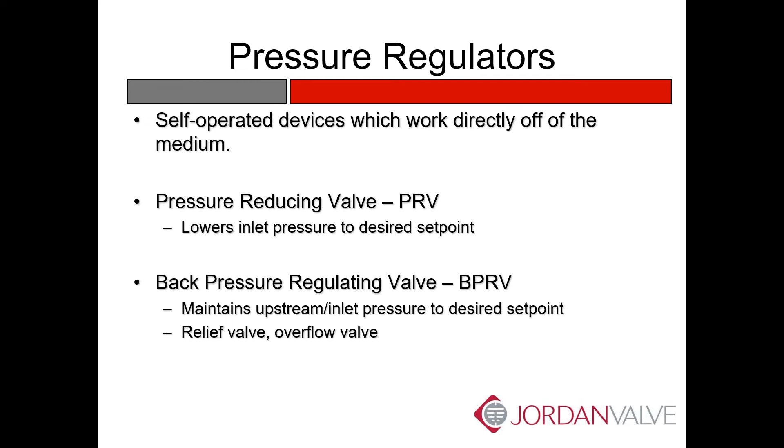Just real quick basics: a pressure regulator is a self-operating device, fully mechanical, which works directly off of the medium whose pressure it is actually controlling. A pressure reducing valve, or PRV, lowers the inlet pressure to a desired set point, the outlet pressure of the valve. So we're controlling P2, the downstream pressure. Back pressure regulators maintain the upstream pressure, a normally closed valve that opens once you hit your set point. Again, basics, I'm pretty sure everybody has some awareness of that.

One thing we want to emphasize here: the idea of this program is to talk about maybe more challenging applications that regulators can handle. And so one concept we want to talk about is the idea of a regulator as a control system.

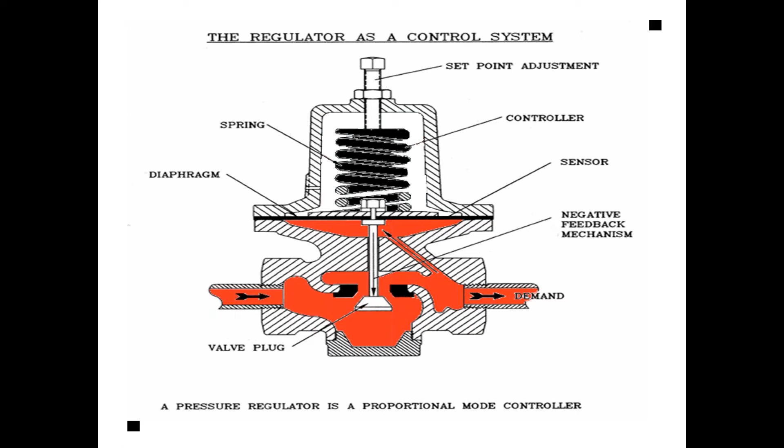If you looked at a control loop, you're going to have a sensor of some type, a transmitter for example. Well, in this case, the sensor is the diaphragm - that's what actually allows this force balance mechanism to work. In a control loop, you need some type of controller, something that is actually telling a control valve what to do. Well, in this case, it's the spring - that establishes your set point. By compressing the spring, you're establishing your downstream set point in a regulator. And then lastly, you need some type of feedback mechanism, something that actually adjusts per the signal of the controller, and in this case it's the valve plug. So even though it's fully mechanical, you can view a regulator or a back pressure regulator as a mini control loop.

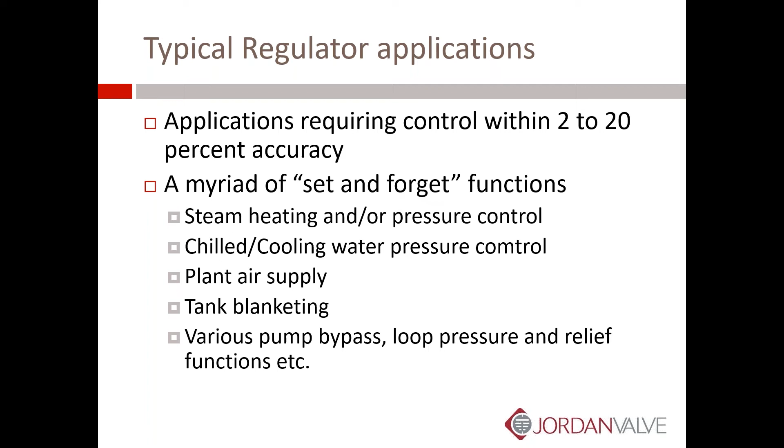Some advantages: obviously it's a mechanical product, so no power is needed to position the valve. There's no 4 to 20 or anything like that involved. You don't have to have separate measuring elements for feedback - they sense internally or through a downstream tap, but it's all mechanical. Designs tend to be simple, low cost, and high reliability. Set and forget, as we said earlier. There's typically no stem packing involved with these, and packing can be a source of leakage, fugitive emissions, that type of thing - that's eliminated in regulators and back pressure regulators. And again, they're force balanced, so whatever it is they're controlling, they are actually in contact with.

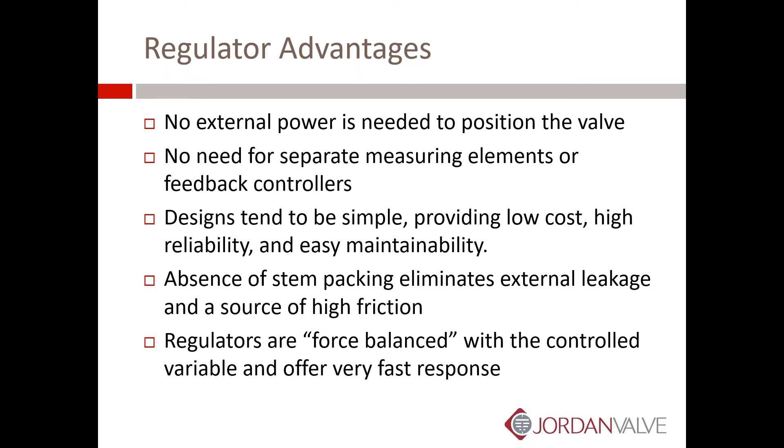Some limitations, because they don't do everything. The media should be relatively clean, free of solids, and fairly benign in terms of chemical interaction. Materials of construction are typically limited.

Operating points aren't constant due to droop. In other words, there will be some offset because it's a mechanical product. And they typically can't accommodate noise reduction or cavitation control trims that you would see in a control valve. And then failure modes are fixed.

In a control product, you can choose failure mode in most cases, whereas with a regulator, like a basic self-contained regulator, is going to fail open 99% of the time.

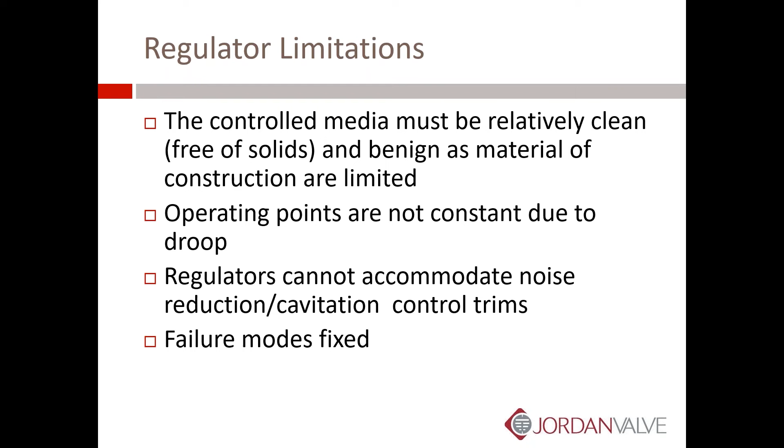So some challenges, and we're going to go through each one of these and how to address them.

So there's accuracy, of course, the offset that you might see in a regulator, shutoff class and the considerations, metal seated regulators versus soft seated regulators, how to apply those, what the challenges are there. High rangeability applications, they're limited on flow ranges. What can you do to address that? Regulators in series, so high differential pressure applications that are normally outside of the capabilities of a regulator. What do you do to address that?

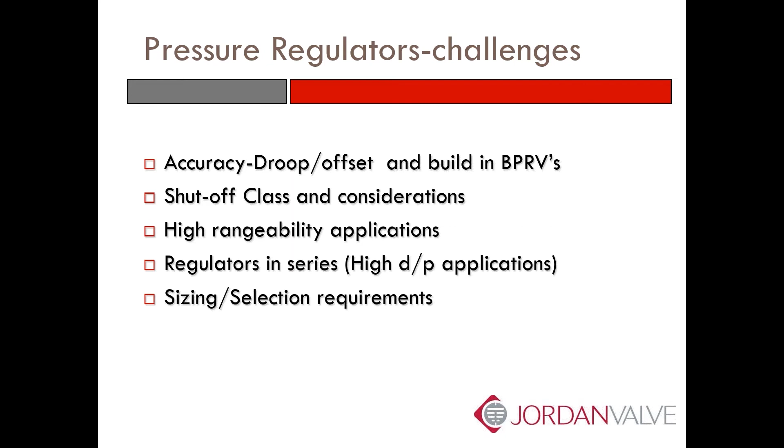And then in general, some sizing and selection requirements in order to ensure that when you do apply a regulator or a back pressure regulator, it actually works as prescribed.

So we'll talk about the accuracy first, or droop is a common term for this, offset. So all this is, as the flow through the regulator increases, there is a subsequent drop off in pressure. In a back pressure regulator, it's known as build or gain. The opposite is true. As the flow through a back pressure regulator increases, the pressure on the inlet side increases. And that's an important point. We'll get back to that here in a few minutes.

And then obviously the lower the droop or the lower the offset, the better the regulator, and the better it typically is for the application. And again, most manufacturers will specify something in the range of 10 to 30%.

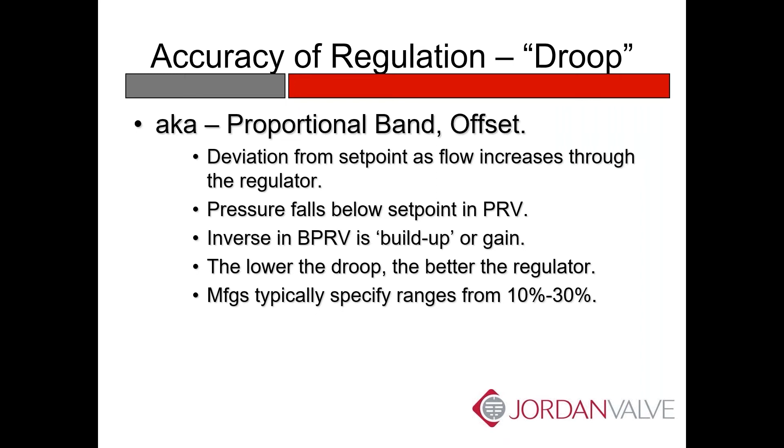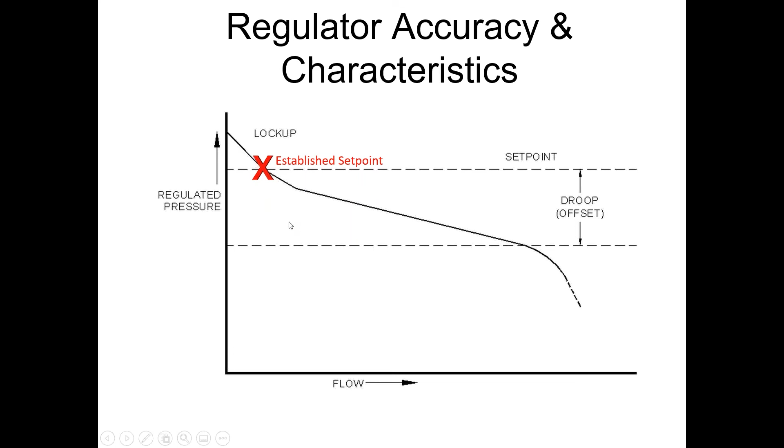Even the lockup, as the flow decreases and you move toward closed, there's actually a little bit of an increase in pressure to fully close the regulator, and that area is called the lockup. So very common in mechanical devices. It's just pure physics, but there are ways to combat it.

So if you look at some basic units, the one on the left is your typical self-contained mechanical regulator. These are great when you want speed of response, you want to keep the cost down, but they're going to have some droop, maybe depending on the application up to 30% offset, which may not be good.

You know, if you're supplying steam to a number of cookers, retorts, heat exchangers, and there's a lot of demand at once, well, you don't want to have a corresponding pressure drop because the regulator can't keep up with the demand. So that's the real world comparison, that it's important for your heating and make sure you're getting the transfer that you need in a steam application.

So one way to combat that is to go to a piloted valve like we have on the right. So these are going to be a little slower reacting because the pilot valve is telling the larger valve what to do, but they're usually higher capacity, and a piloted valve will also be more accurate. So now maybe we're in the 5, possibly 10% droop category. So much more accurate across a broader range of flows.

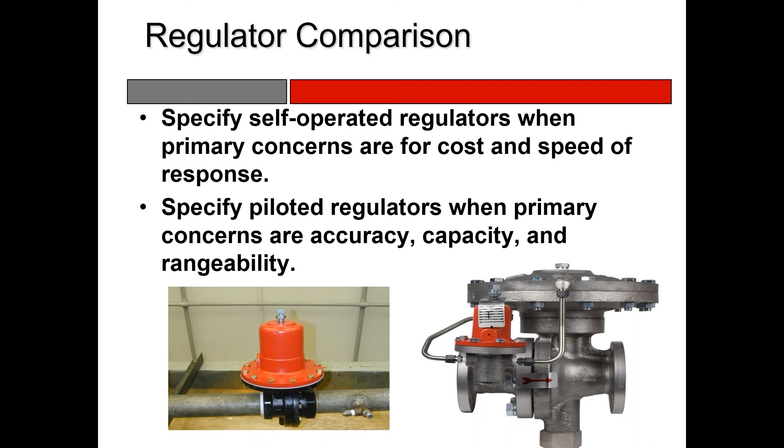So that's 2 steps that you can take to improve on the overall accuracy. And here's a little hierarchy of that. The first one, self-acting, which we talked about, 10 to 30% piloted, we talked about 5 to 10. But then there's also air-loaded.

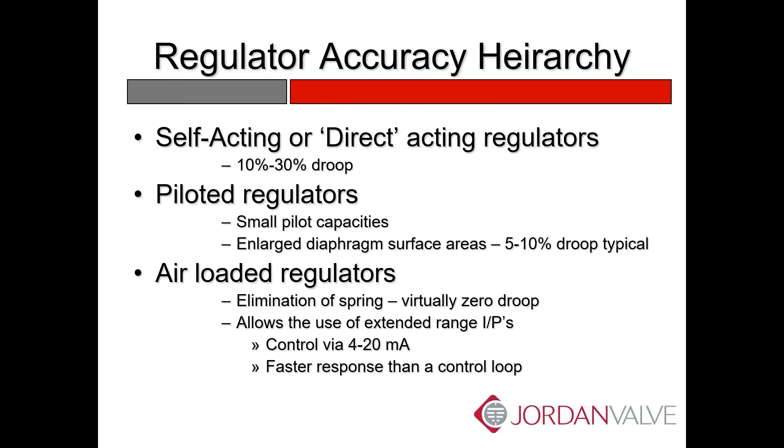Again, that spring in the regulator compresses and decompresses because flows are changing and the seat position is changing. That's where a lot of that offset is generated. But you can actually do an air-loaded regulator, which eliminates the spring, and then has essentially 0 droop, because you're not changing that compression at all since it's actually not even there. So a valve such as this can be a good option.

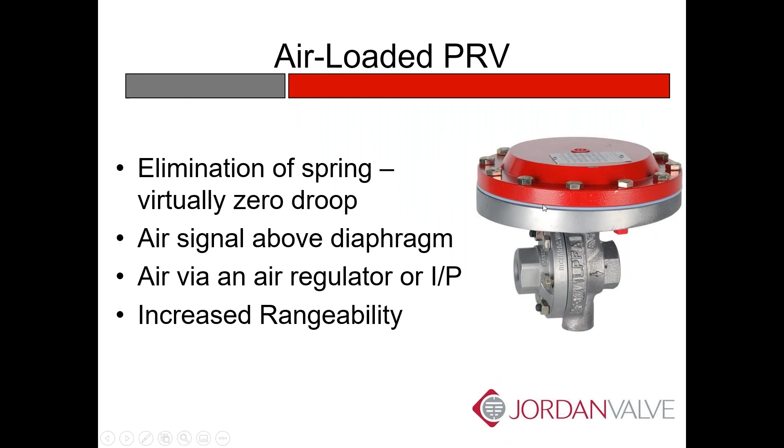Now you do have to supply some type of air signal. You can see the port on the top here, hopefully everybody can see my cursor. So you have to put some type of air signal onto the top of the valve, and whatever you put onto the top of the valve becomes the set point of that particular regulator. So again, you're looking at applications where you're still in a mechanical product, but you're looking at almost 0 offset. So control valve accuracy, but without nearly the cost to actually install these.

One, if you have a regulator or back pressure regulator that's in a hard to reach area, maybe it's up toward the ceiling of a facility, or it's on a skid and it's behind a lot of equipment, you can remote mount the actual regulator and run tubing to this valve. So if you need to make adjustments, maybe for one product you have a certain PSI that you need, a certain pressure, but then other times you need higher or lower pressure, you can do all that remotely.

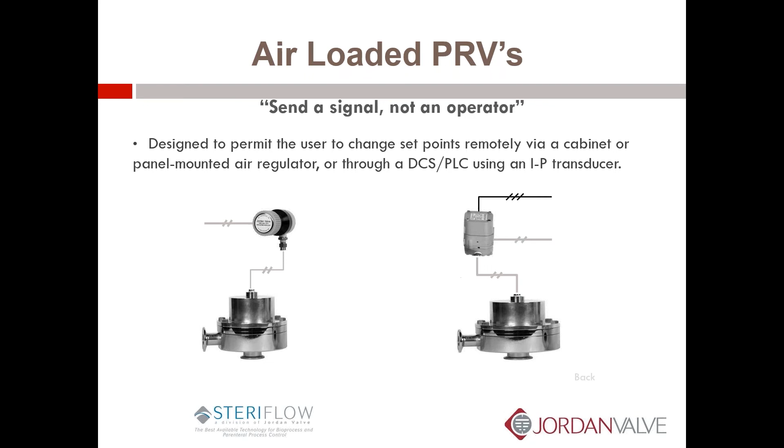So moving on to another topic, shutoff class is something else to consider when you're applying these. The most prevalent 2 you see out there are hard-seated or metal-seated valves, and those are ANSI class 4 shutoffs. Their allowable leakage is 0.01% of rated capacity, and that's not a lot, but depending on the application, it can still be too much. Metal seats are very common for general utility applications, meaning steam, chilled water, glycol, plant air, nitrogen, a lot of very common applications that you see out there.

The other seat material or seat type and shutoff class is soft seat, where you've got it could be Teflon, EPDM, Viton. There's a lot of different materials available, and those are ANSI class 6 shutoff, which is bubble tight. It's still not zero leakage. So the bubble tight thing, not necessarily a misnomer, because it does have allowable bubble leakage that's based on size and CV and a lot of other factors.

Where we see class 6 shutoff specified more is in tougher applications, like hot oil. You don't want hot oil leaking through. If you're heating something and want the flow to stop using a class 4 shutoff, you're going to get leakage, and you may end up overheating a process.

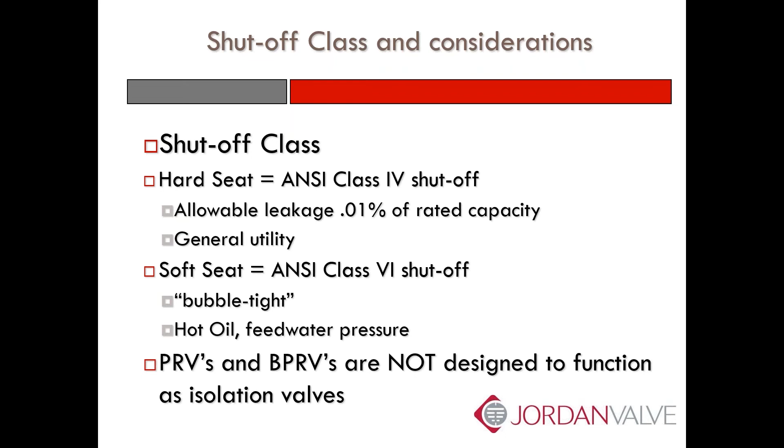High rangeability applications - what we're referring to here is the ratio of minimum flow to maximum flow. It can be steam, water, oils, doesn't matter. With a mechanical valve, there are limitations on that flow range. For example, if it's water and you're trying to go from 1 GPM to 200 GPM, you can't do that in a mechanical valve. The range is too wide - it doesn't have enough resolution to handle that flow range and still provide accurate, reliable pressure reduction. It's just impossible in a mechanical valve.

But there are ways to approach that and minimize offset or droop. In this case, we actually use droop as a positive - one way to address this challenge is by putting regulators in parallel. The desire here is to stick with something mechanical. If you put them in parallel, you can take that flow range and approach it so the smaller regulator handles about 1/3 of the flow, and the larger one handles 2/3. Then you just slightly stagger their set points.

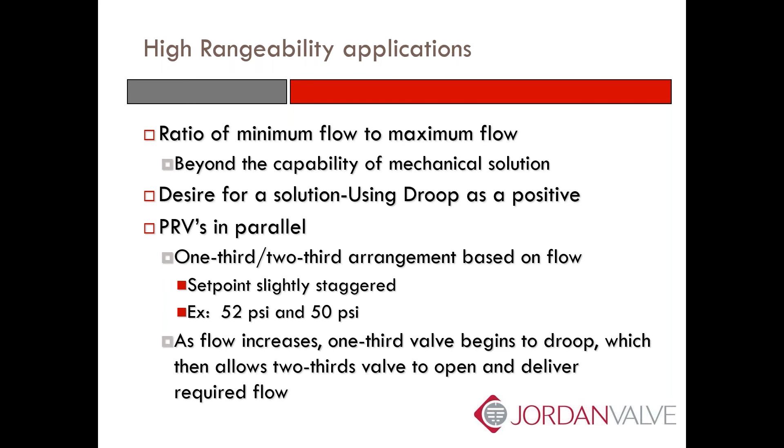And then regulators in series. The challenge here is you have a high pressure application and you want to reduce that to a much lower value. Again, it could be anything, water, steam. Water brings its own challenges because of cavitation, so that's always something to consider. But here, just pick random numbers.

If you're ultimately trying to go from 900 PSI to 125 PSI, most regulators cannot do that in one step. The delta P is too high, and you've got to remember that the downstream pressure is all you have to actually modulate that regulator. And if the DP is too high, the trim's not going to move and position itself the way it needs to.

So the idea here is to two-stage it. Find products that can handle, in this particular example, a 400 PSI drop, and then something that can handle 375. Could be the same valve, just a little bit different size, and you still want to incorporate flow rates and all that, and we'll talk about sizing in a few minutes. But in general, this is a good way to do it.

The one caveat that you always want to make sure of is that the second regulator in series has a max rating above the inlet pressure of the first valve. So in this situation, you want to make sure the second PRV is rated to 900 PSI in the event the first regulator fails. They typically fail open, so now all of a sudden that second regulator could see 900 PSI.

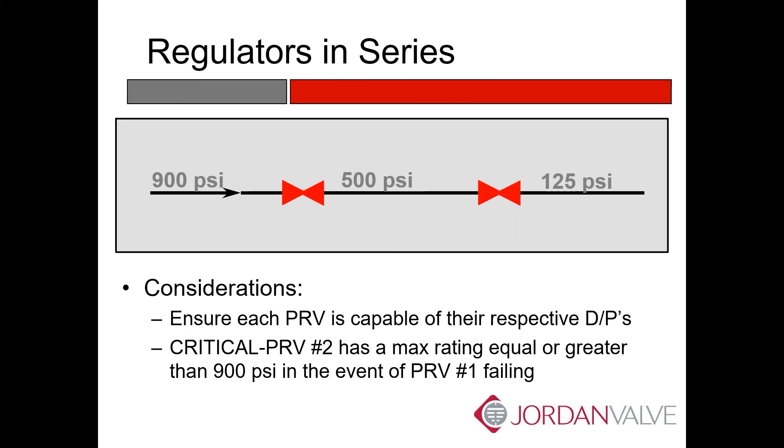So valve sizing, we referred to this a couple of times. And the sort of joke that I used earlier is, I need a 2-inch regulator. We get those phone calls a lot, but that leaves a lot to the imagination and doesn't give us much to work with. And if you look at the range of CVs that are available in a given line size, for example, the idea is to dial it in as closely as possible.

So line size, obviously at a minimum, although normally the regulators are not going to be line size, and that's important. People always ask about costs, and if you size a regulator right, usually it's a line size reduction, and that helps save money. So we want to know the inlet pressure, obviously.

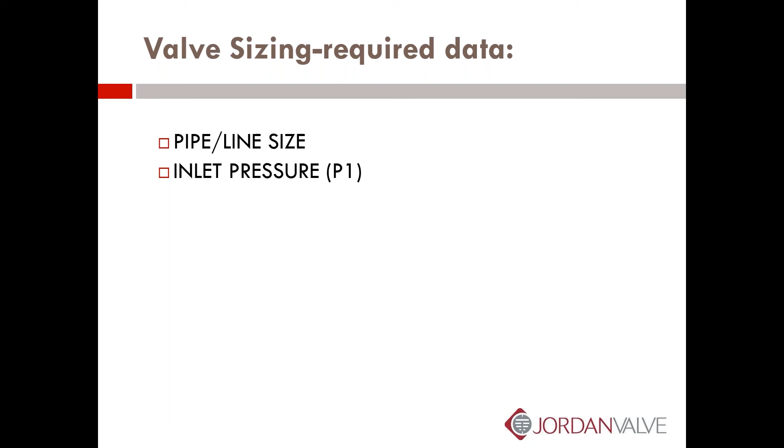We want to know the outlet pressure, P2. At least maximum flow. It's nice to know minimum and max, so that again we can see, can one regulator do this? Does it need to be 2? Is it beyond that capability? But at least maximum flow, so that we know we're not going to starve the system.

Again, using steam as an application, if we don't have enough capacity or CV in a regulator, all of a sudden your heat exchangers are looking for more heat, more steam, and we don't have the capacity, you're going to starve your system.

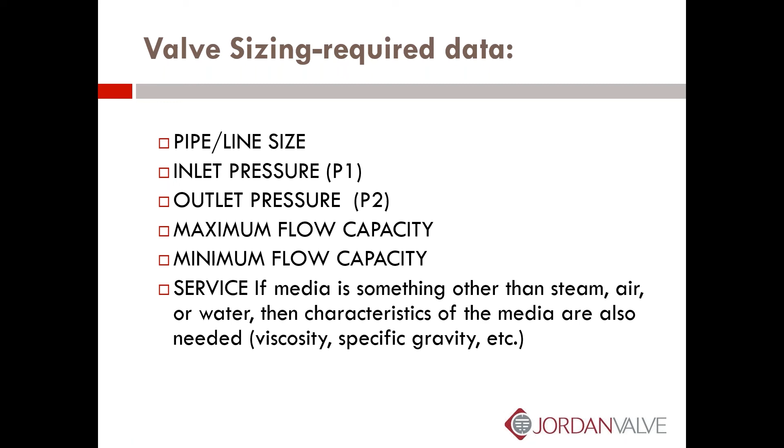And then what's going through it? The normal things, steam, air, water, those are pretty straightforward. But if you had something like an oil or something viscous, we want to know the viscosity, the specific gravity, again, so that we can compensate for all those things. But by using all these, it allows us to actually pick the right CV for a given size.

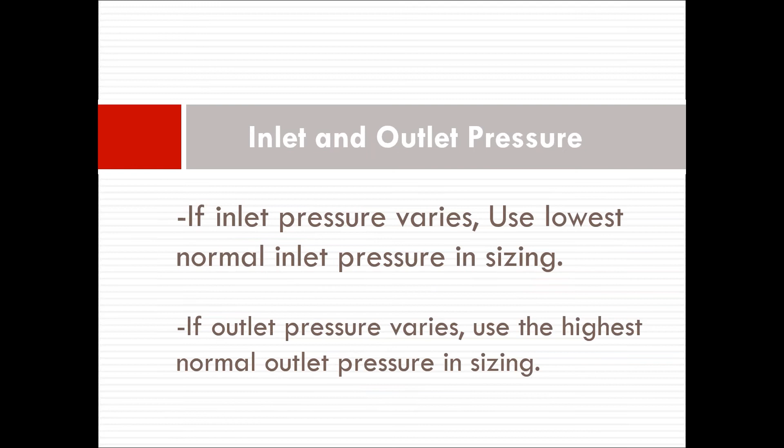So if the inlet pressure varies, we normally would use the lowest of the inlet pressure. And if the outlet pressure varies, we usually use the highest. And the reason for this is, we want to have the smallest differential that the valve might see and incorporate that with the maximum flow, so that we know worst case scenario, here's the absolute largest CV we need for that valve.

So again, minimum and maximum flow are great, but we want to size this with the minimum differential pressure with max flow, and then the max differential pressure with min flow, if we have all the information, because that will give us the entire CV or the entire calculated CV range that valve may see. And we might come back and say, hey, we can't do this in one valve. And a lot of times, this works out nicely.

A lot of times we go back and size it in the extremes. We say, look, we can give you a valve that handles the max flow, but it's going to struggle at the low end. It's going to be oversized, might cycle a little bit instead of modulating. Or we can give you something that will handle the min flow, but we're not going to be able to do the full capacity. Which is more important to you?

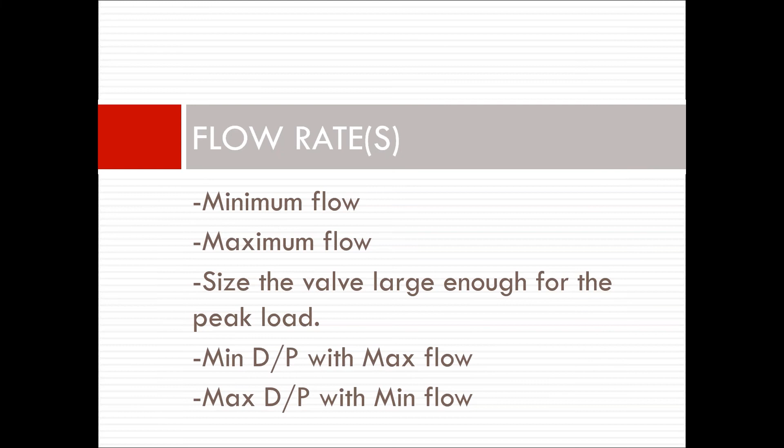The great thing is, by giving us this information and using this data, we can make good decisions even if it's beyond the realm of capability of one valve. We can come back and say, what's more important, max flow? Are you heating things and you want to make sure you have that max flow? Great, go with this. Or do you need that min flow control? The beautiful thing is, in a lot of these applications where one valve really can't do it, by giving you that choice, we still can keep it into one valve. You just have to give us feedback as to what's more important to you.

Then there's sizing factors. When you go to a sizing program, ours or anybody's, it gives you the required CV, the exact number required to pass the flow you need in those given conditions. But what we recommend is using a factor for each one. For example, pressure regulators, we use 0.7. You take that required CV and divide it by 0.7, and that gives you the optimum CV, which should be very close to the installed CV.

The reason for that is, when you have the calculated CV, that assumes the valve is at 100% open. So if you're trying to control pressure and the valve is approaching 85, 90% open, it's becoming an orifice at that point in time, and an orifice doesn't control well at all, as I'm sure everyone here knows. So that's the reason for that sizing factor.

Control valves are inherently more accurate, so that's just a 0.9, because you can function up to 90% on most control valves and still get good resolution and control. We recommend—the piloted one's wrong here, so I apologize for that, that should be about 0.9. That's why we have the sizing factors, so the valves still operate in the sweet spot, as the cliche goes, but give you good performance across the range you're looking for.

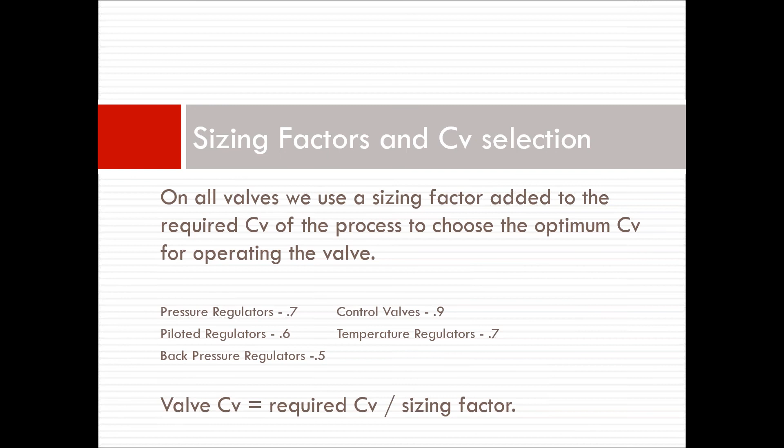I'm going to switch gears now, to another topic: tank blanketing. This isn't so much a challenge, but a completely different type of regulator and style, so just wanted to throw that in there. We hadn't covered this in Regulators 101, but tank blanketing is the process of providing a blanket or pad of gas above usually the liquid level on a closed tank, where there are issues or challenges with the gas being explosive or harmful to the environment, that type of thing. So you take an inert gas, typically nitrogen, and blanket or pad that device.

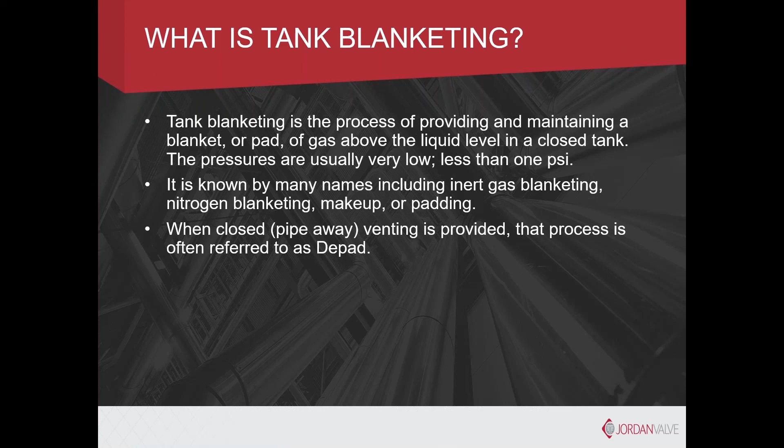Then there's usually some type of Depad or vent included, and again, depending on what's inside the tank, it can be vented to atmosphere, or it could vent to some type of containment or even flare at times. Why do we blanket tanks? Protection—people, environment, product, equipment. Whatever's in the tanks could be combustible, so it removes the oxygen required for combustion. It can prevent oxidation within the tank and evaporation. You don't want these vapors—typically there are applications where vapors would be very harmful, so you don't want them going into the atmosphere, and you're also hoping to reduce corrosion within the tanks.

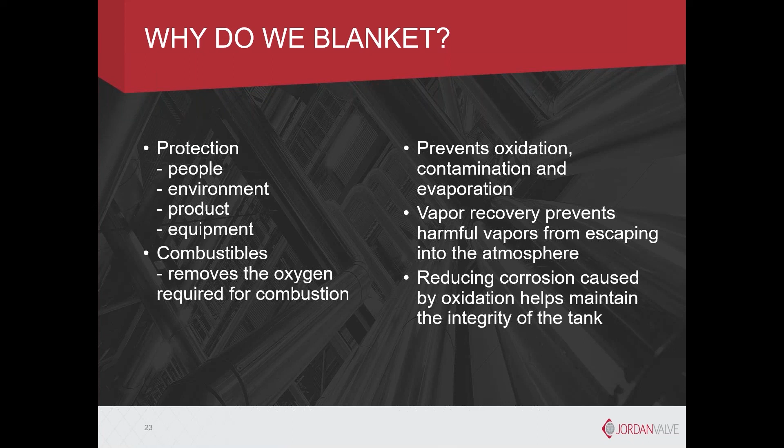Most prevalent gas used is nitrogen, though there are others. Ironically, I have seen natural gas used as a blanketing gas at times also, which surprised me, but that happens.

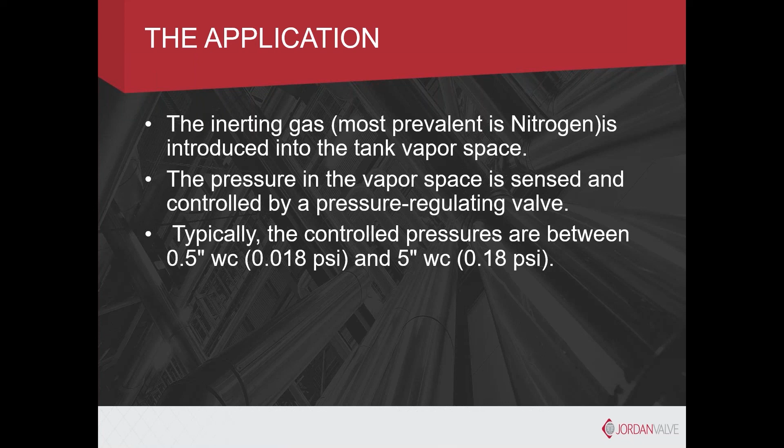The pressure in the vapor space is sensed and controlled by a pressure regulating valve. The big difference here is the control pressures are typically in inches of water column, maybe up to 5 inches water column inlet, and then you'll have a vent on there, which can be mechanical, maybe at 8.

One other key thing, if you're looking at applications like this—this is the biggest question I get, and it's a challenge for you all as consumers, maintenance folks, and engineers—the sensing line should always be attached to the tank.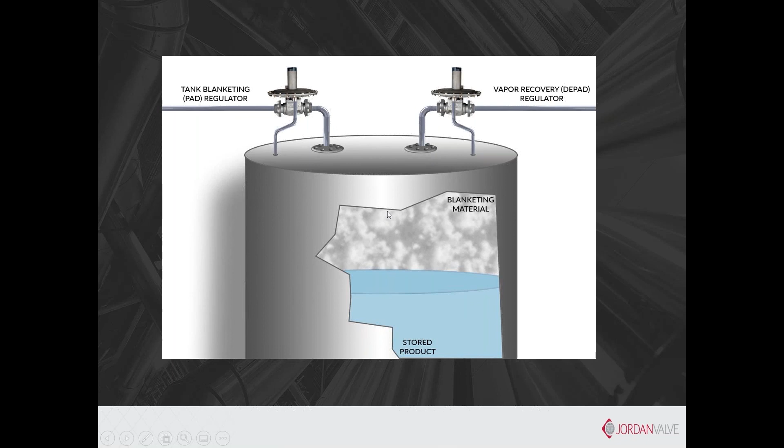Why do we blanket, or what do we blanket? Anything that could be harmful to the environment, but it also includes foods. I know we do a lot of orange juice blanketing with nitrogen, and that's just to keep the oxygen from getting to it and ruining it, basically, is all it boils down to.

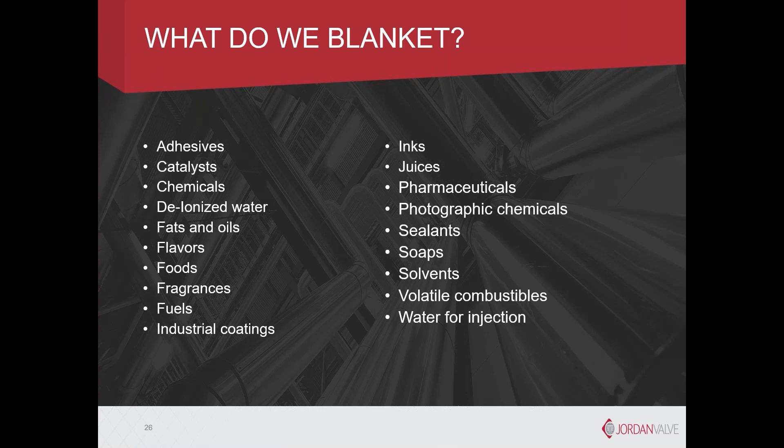So there's a lot of different applications, and a lot of it is just preventing product breakdown, particularly in the food and beverage markets. It's not just necessarily nasty chemicals or things like that—there's a lot of different applications and need for nitrogen blanketing.